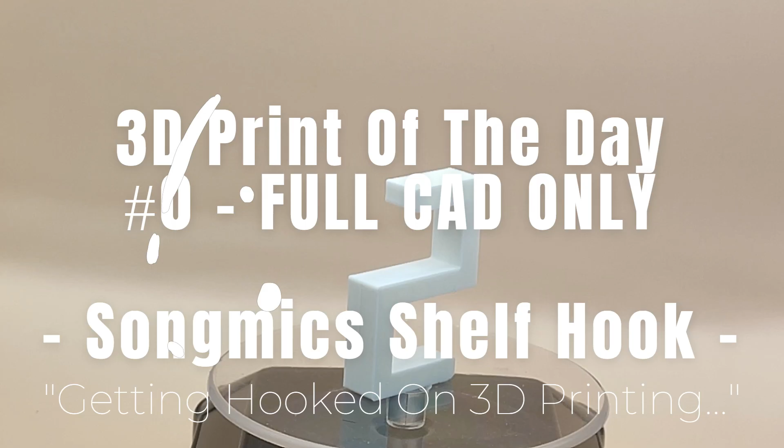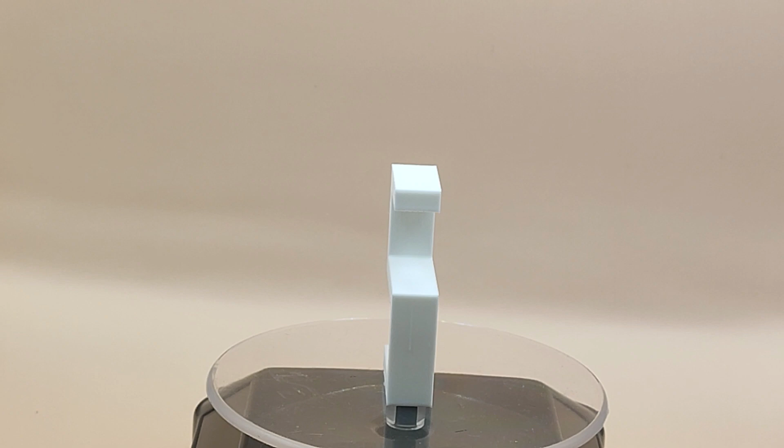This is a complementary video to the other one, the 3D print of the day, the Songmics hook. In that video I had a time lapse of the 3D CAD changes I made to the original model I fetched from Printables. So I thought it would be good to split the videos up, for those who want to see exactly what changes I did and how I did them, and for those who just want the time lapse without spending too much time in the 3D CAD.

I'm using 3D Builder software, which is a very basic 3D modeling software. Maybe CAD is a bit too optimistic for that application, but since I'm a newbie, I'm using 3D Builder since it's easy to start with and take your first steps, especially for modifying existing 3D models, like changing sizes, cutting and pasting, and stuff like that.

So here we'll follow the 3D CAD process for those interested in the changes I did, in case you'd like to make the hook longer, shorter, wider, make some cuts, or append something. So that's basically what this video is.

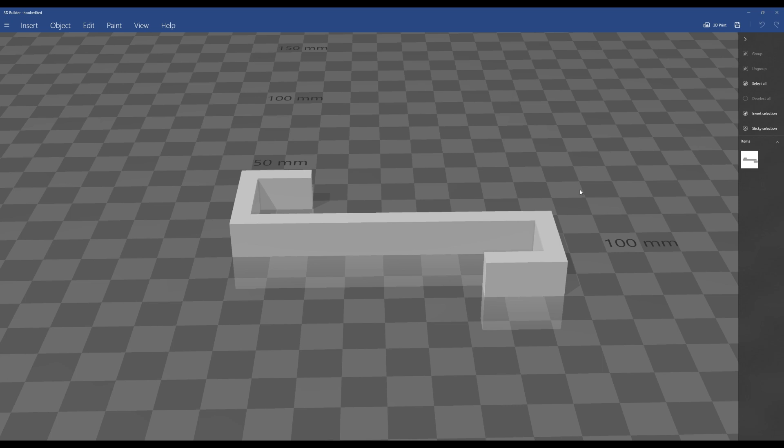Alright, I have imported the 3D model hook into 3D Builder. I'm using millimeters, the metric system, since otherwise I'd go nuts, as I'm not used to other measuring systems much. So here we have the hook.

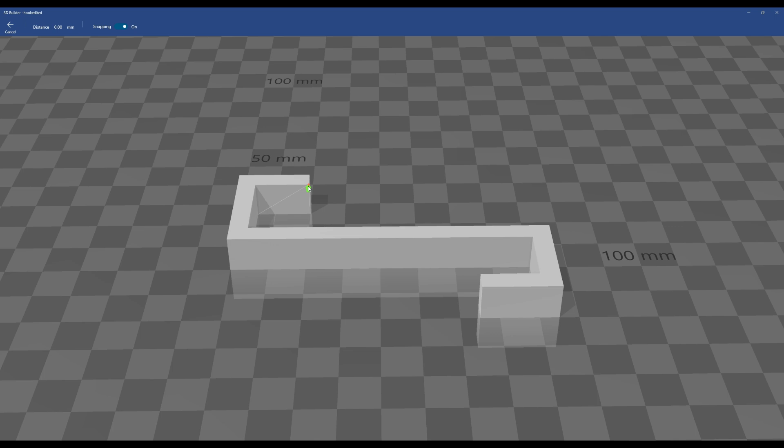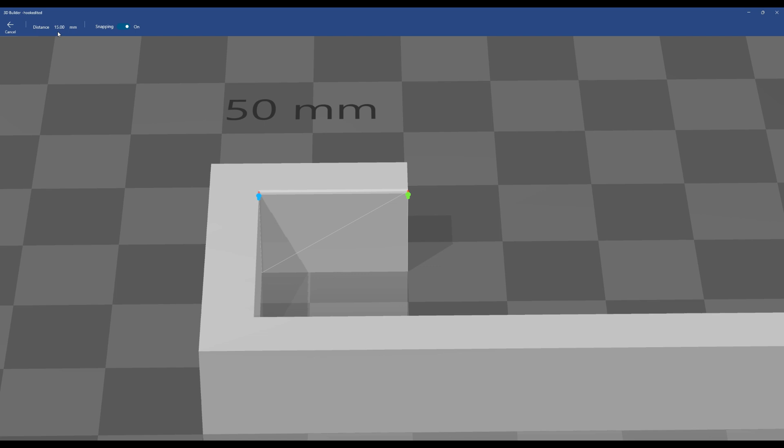Let's see what we can do. First I want to measure a bit. I'm thinking this part will go behind the shelf, so the part that's not hanging outside. If I measure from here to there, zooming in, we have 15 millimeters. And I wanted to have 16 maybe.

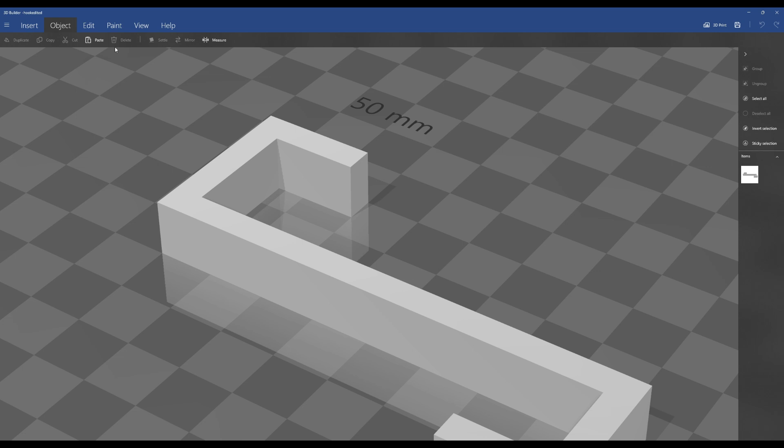So if I want 16 millimeters, I can also measure this block - 5 millimeters there. And the height is 10 millimeters.

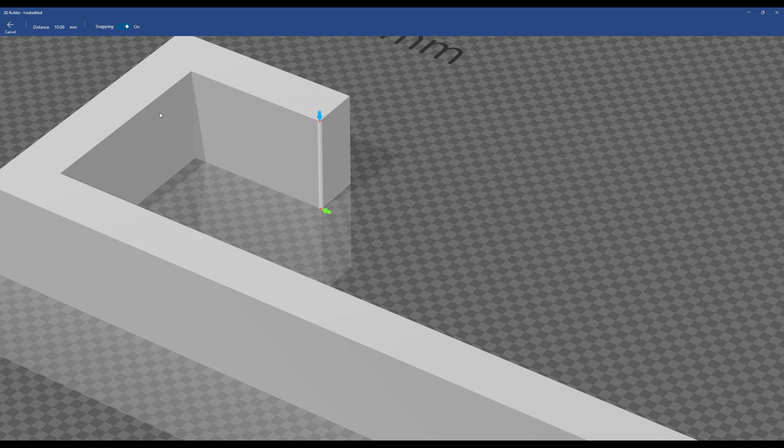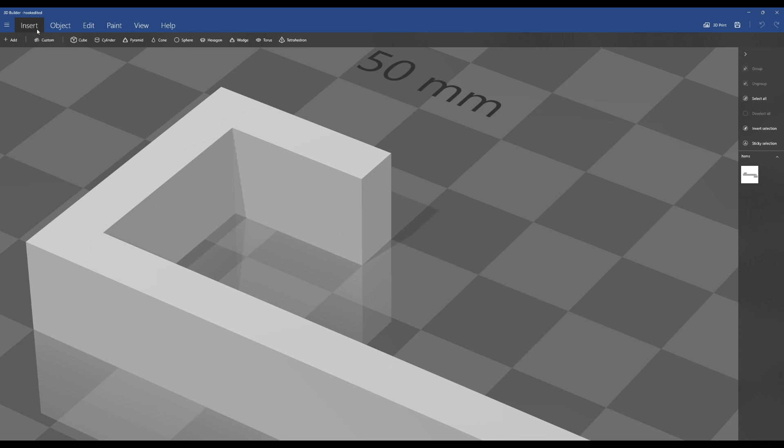If I insert a new block, excuse me if I'm slow here, I've never been able to do 3D stuff before, so here we are. 5 by 10 millimeters. So if I insert a cube, and move it a bit, the side and dimensions - X is this way around, so I want 1 millimeter.

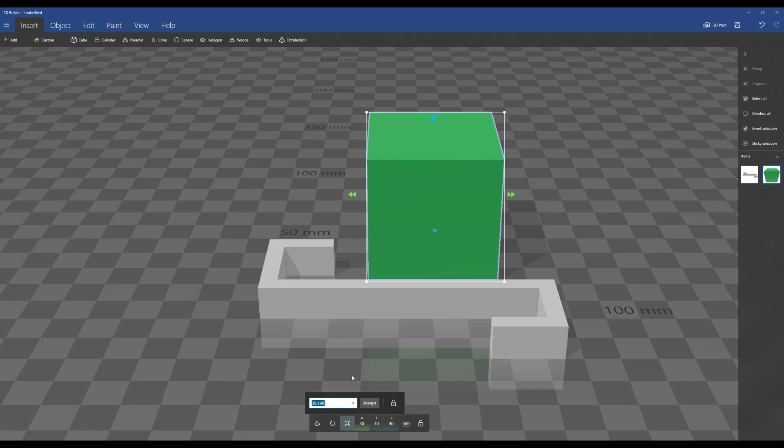1 millimeter extra, and then Y should be 10 millimeters - no, 5 millimeters, sorry. Getting a good start here. And the Z should be 10 millimeters.

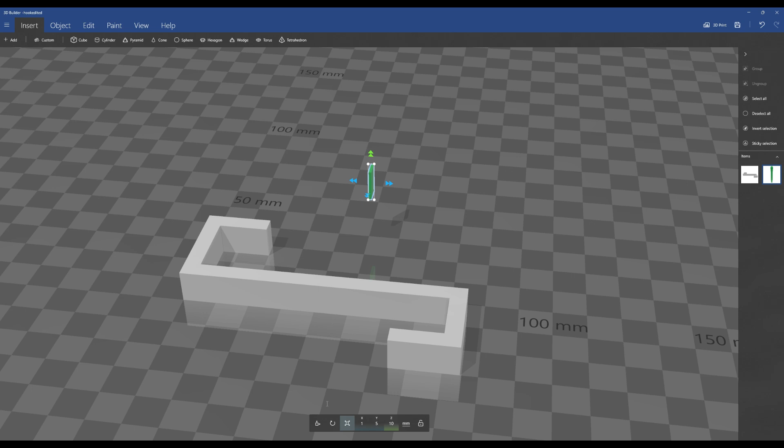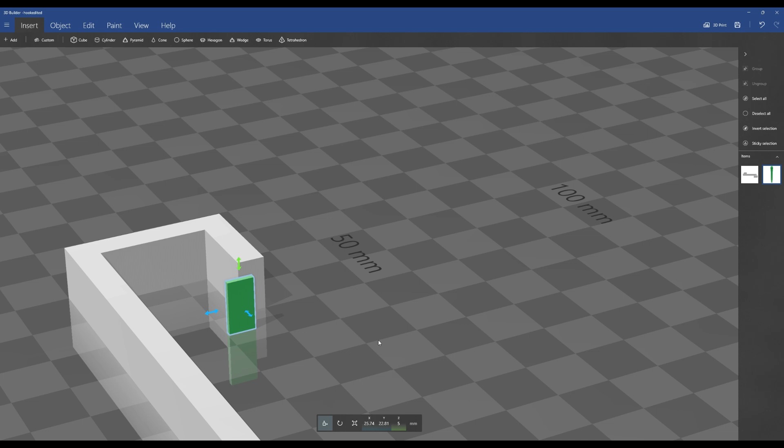And now if I move it around - it should fit, right? No, I've messed something up, haven't I? No? Yeah? Or no, I think the 3D stuff is just confusing me a bit. I'm sure I'll get used to it.

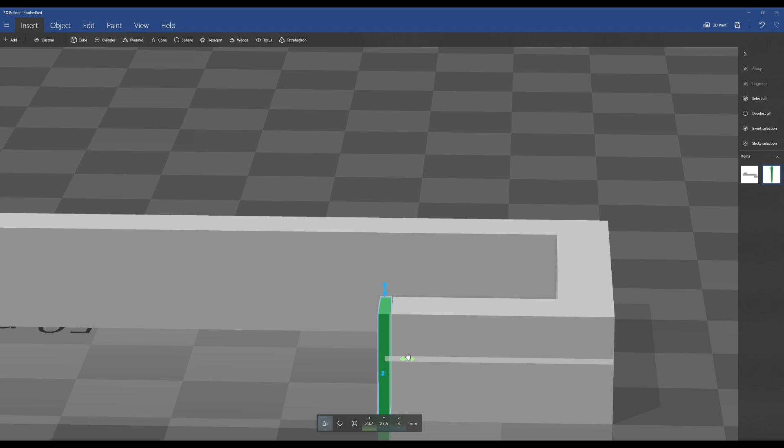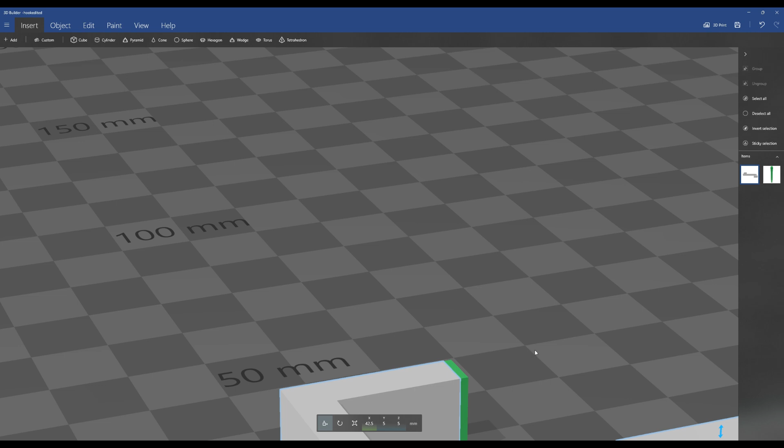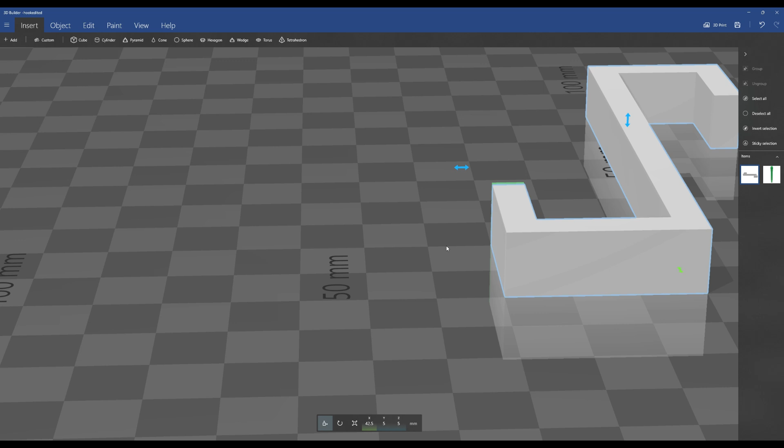Is it correct? Can I have a closer look? I don't know how to do this the right way, but I suppose I can look from here if something is protruding somewhere. If I deselect all there - right, now it looks pretty nice.

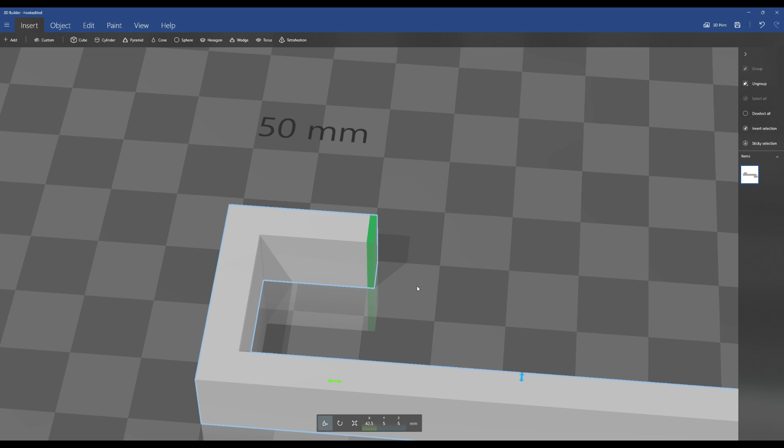So with the addition of that, I can hold the control button and group them. I think that's right. And if we measure this now from there to there, we get almost 16. Maybe it's good that it's not exactly 16 - it doesn't matter. So that part is done.

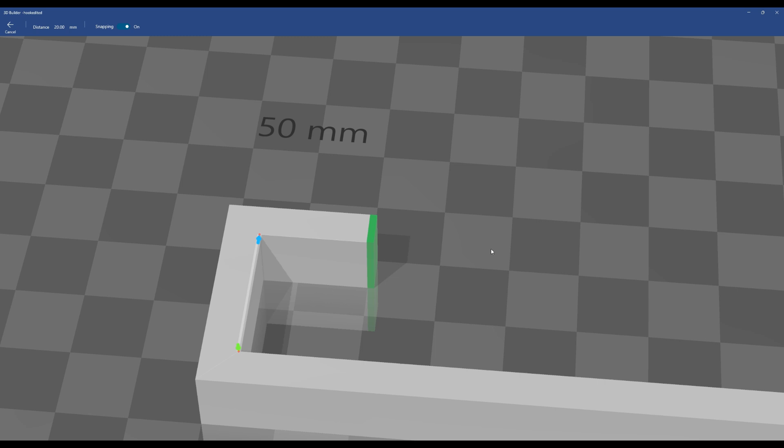Now I want to measure this part as well. It's 20 millimeters. So I want to have it - was it 16 also? 16 millimeters as well.

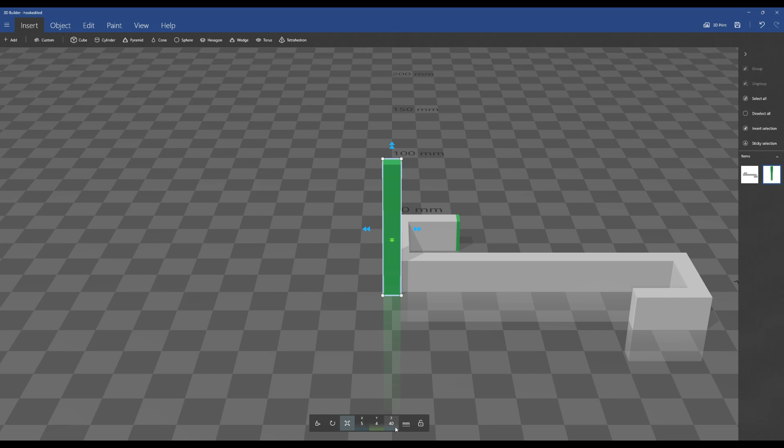So maybe if I can insert a new cube, which is 5 millimeters, and I want to remove 4 millimeters, and the height doesn't really matter, but we can set it to 10.

So if I go to the move option, if I place it on the ground so to speak, if I can remove this part from it we should be good, and then concatenate the other ones together. So maybe I can go to edit, subtract, maybe.

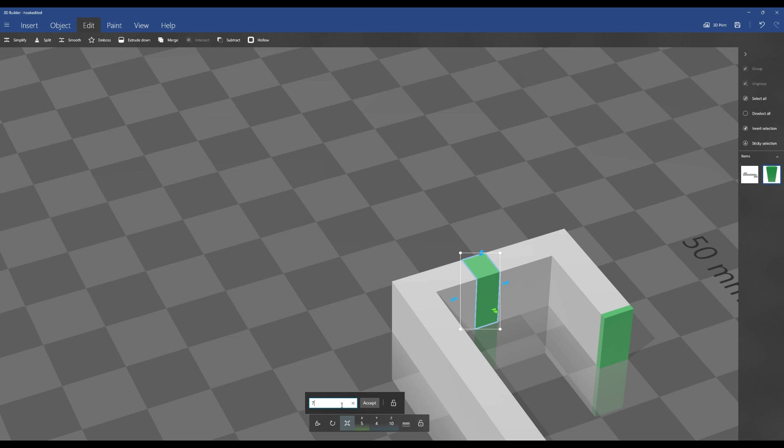Almost. Well, I can make it easier for myself by setting the X, not the position, but I can set it to 7 millimeters. And now I can subtract. Yeah, this is fun.

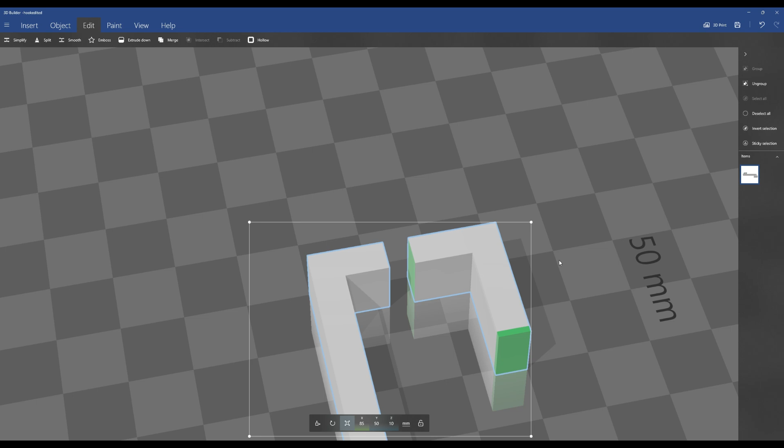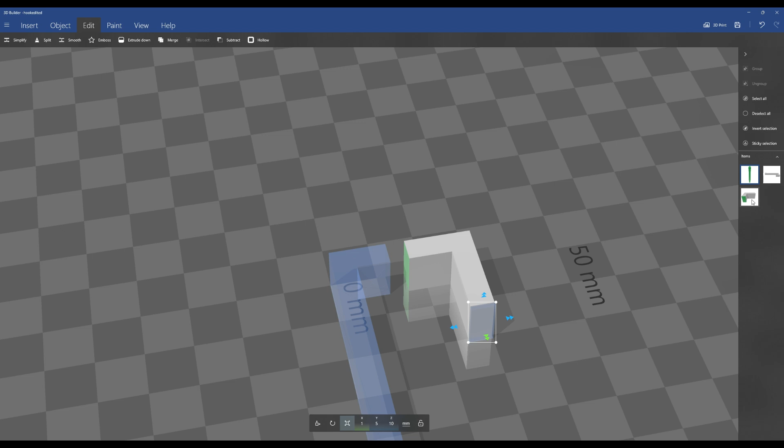And now, can I? How do I grab this object? Oh I see, okay, so I ungroup things, but this one and this one - if I control click so both are selected, and group only those, will I be able to move and drag this? Yes.

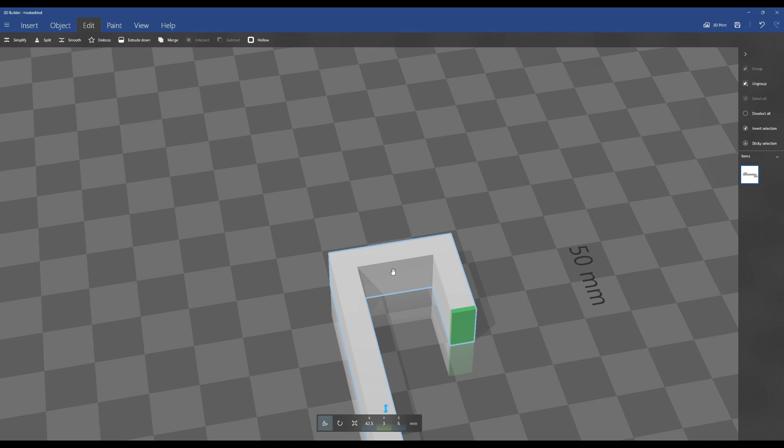There. And then if I group them together, then they're all in one piece. This is great fun.

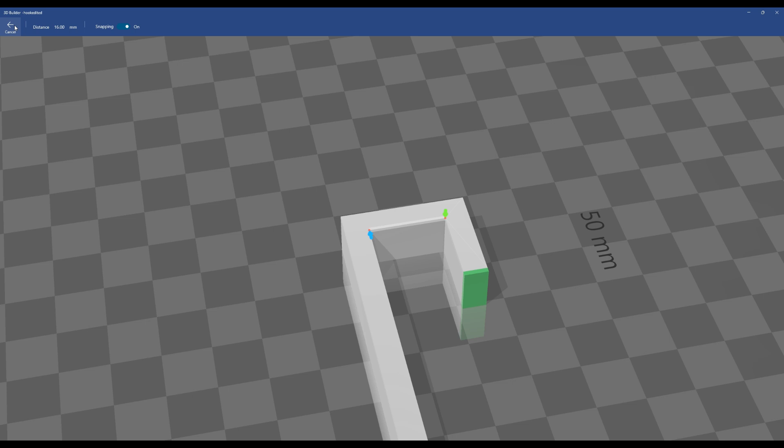Now, object measure - let's try to measure this. 16 millimeters, how convenient. That math works also in 3D - it was very unexpected, but we seem to have proven something. Maybe that I suck at this, most of all.

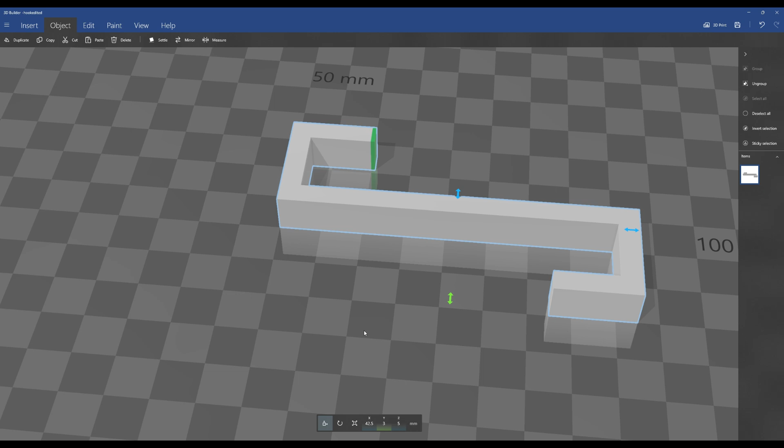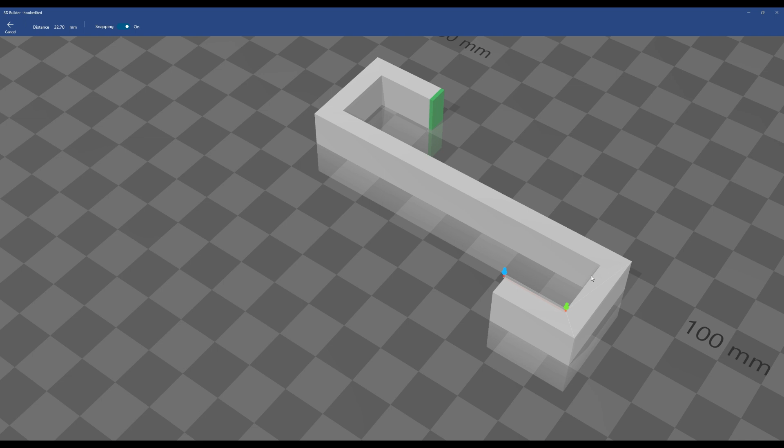Let's measure this hook part, which will be on the outside - 15 millimeters. And then 22.7 millimeters. I don't know about the hook here, how I want it really, but let's leave the hook part as it is for now.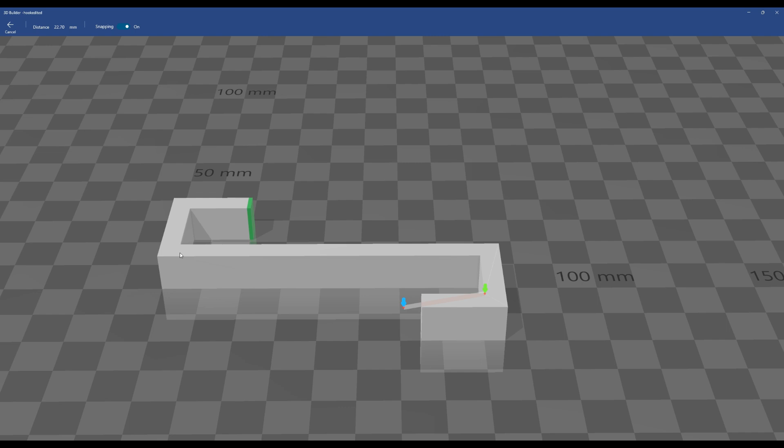So let's measure the distance from there to there, how much overhang we have, so to speak. 80 millimeters. Well, actually, the overhang, maybe it could be like 2 centimeters.

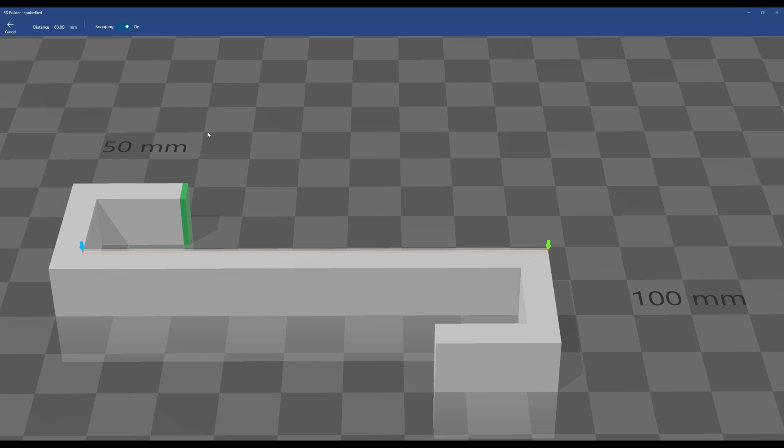So if we remove 60 millimeters, should be. Well, actually, I should maybe include the edge. Should I measure to here or to there? The bottom will be there, so the perceived length will be up to the outer corner here.

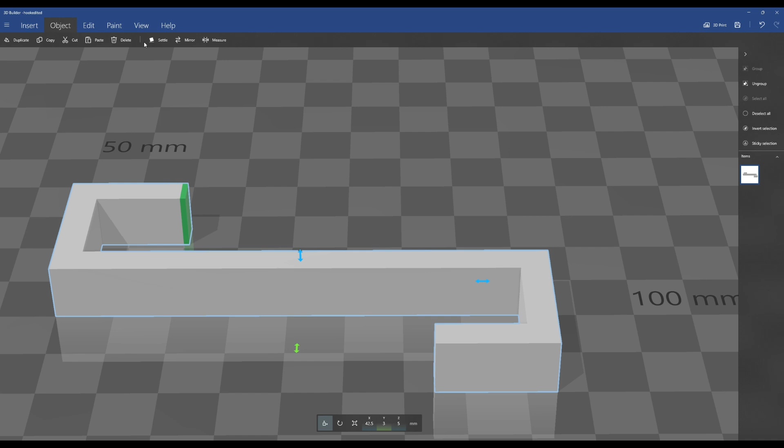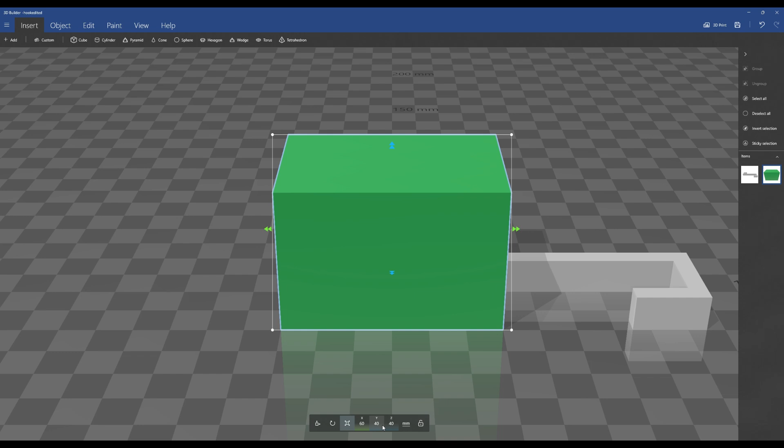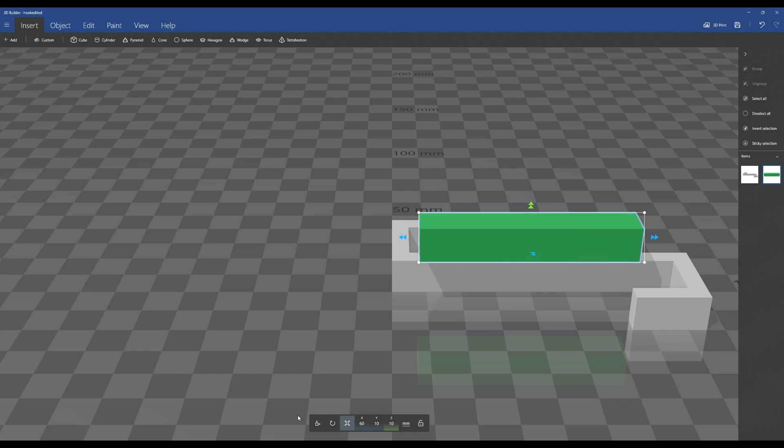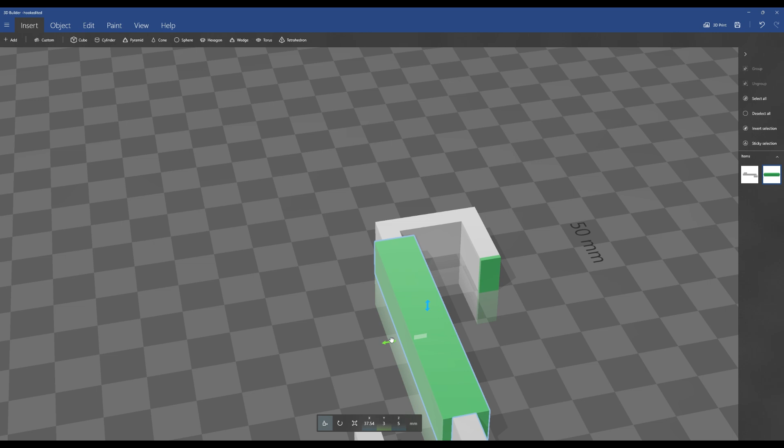But basically, let's insert another cube, which will be 60 millimeters to remove. It could be maybe 10, and Z doesn't matter really, but it could be 10. So we would remove something like this. Does it seem right?

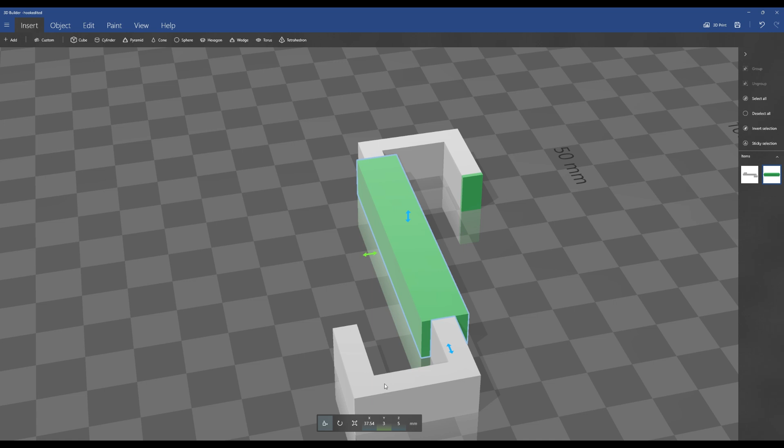Well, maybe, right? If I go 2 centimeters to the bottom from there. Yeah, I could. X could be 55 instead, like that. And then we choose edit, subtract.

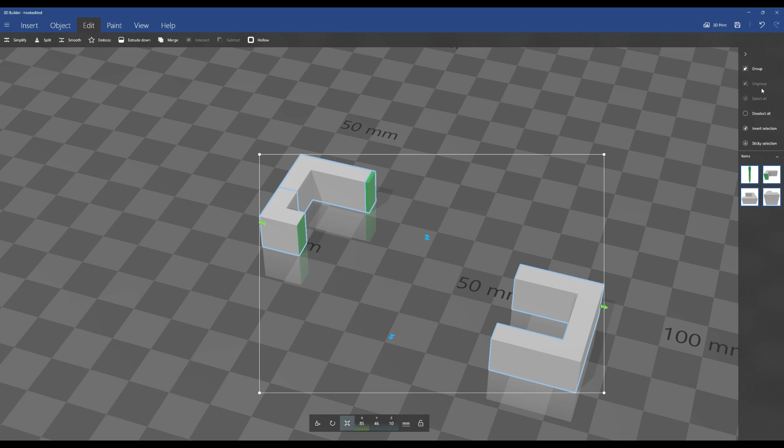And ungroup. But it ungroups everything always. Can I make something stick? But okay, it understands that these are separate at least, so I could move this until it hits it. It seems to snap there.

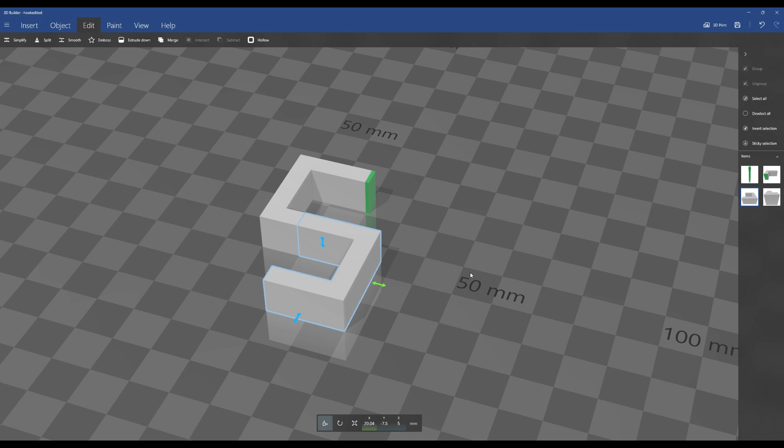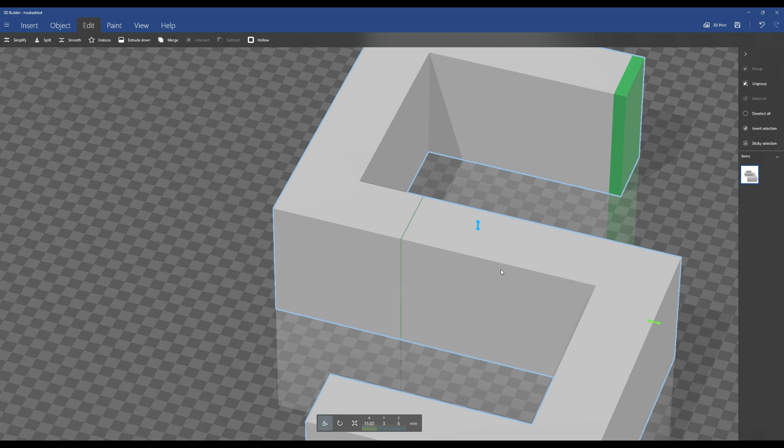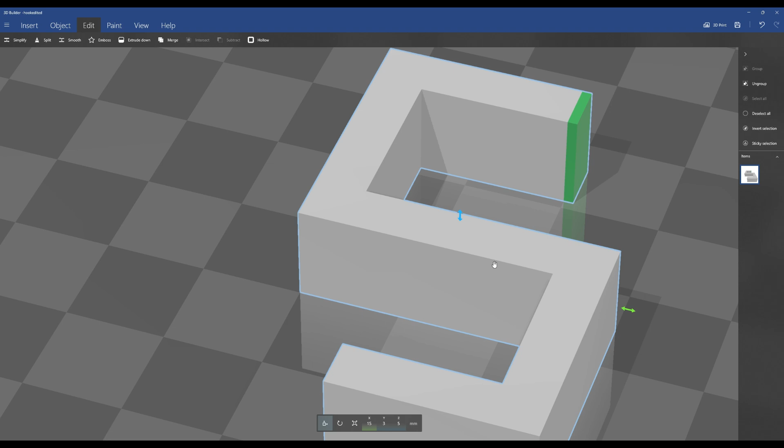And then if I select all and group, oh, we got some kind of issue. I don't know, is it touching? Maybe if I just press Ctrl Z. Oh, sorry, and select this one. If I go a little bit further in, select all, group. Well, okay, now I don't have a joint there. I don't see any green.

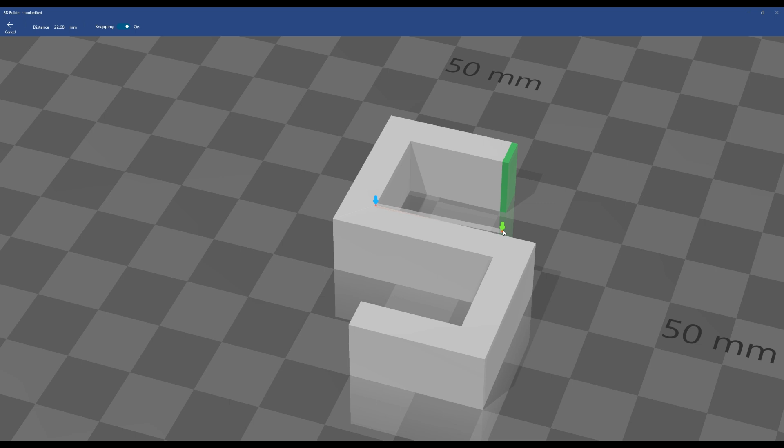Let's measure this one. So from here to here, it's 25 millimeters, and from here to about here, it's 22, should be 22 and a half about, yeah. So yeah, there's a hook. I haven't yet printed it out, so we don't really know yet.

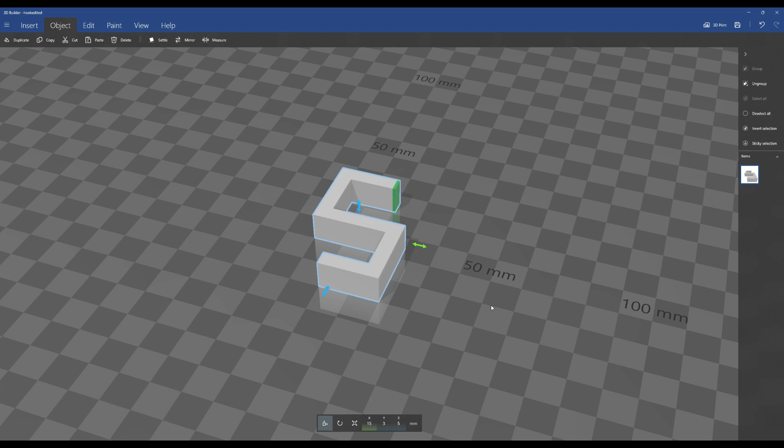All right, but I suppose let's try to print this out. I will.

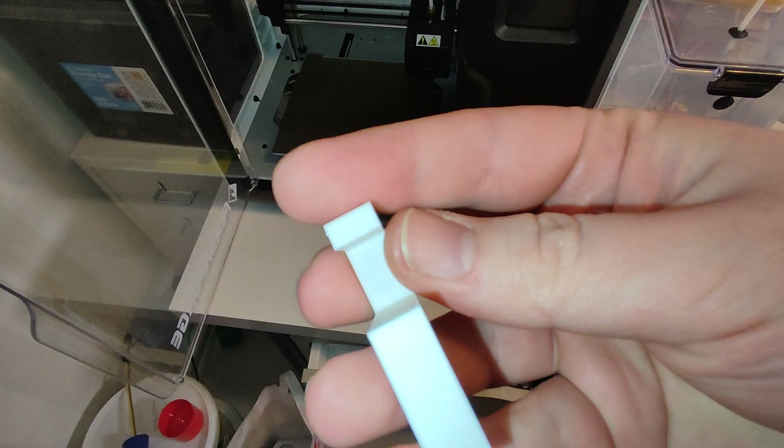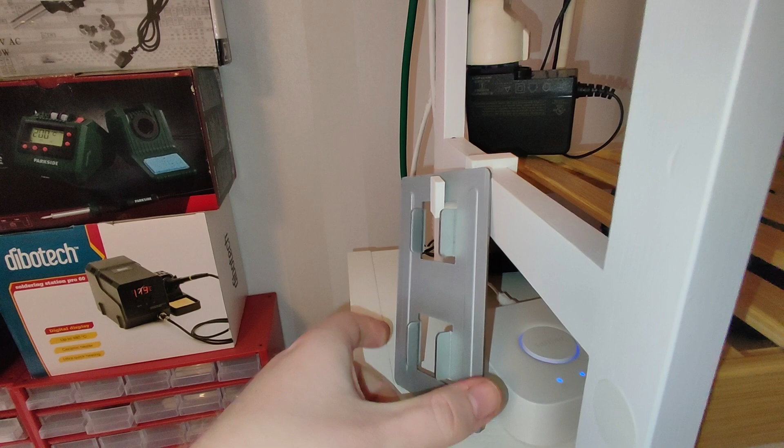Try to do it like this instead. There's about, maybe 1 millimeter of play. That's good, it slides so I can easily slide it around, hang on it. Maybe this is not the best example, but sure, let's see here. Yeah, we do have some more space here actually. We could have made it a little bit longer here, it would be sturdier maybe, but yeah, it's good.

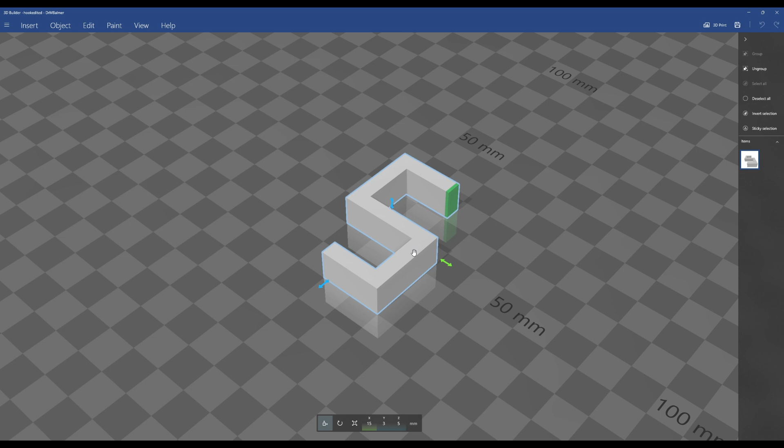So there we have it. So the hook was a success, I think. However, I think we can do a little bit better. I wanted to see what happens. Well, we could make this a bit narrower.

Allow me to remeasure this from here to here. It's 16 millimeters. I would like to reduce it by half a millimeter, since this part of the shelf is seemingly 15 millimeters. There was a millimeter of play, so maybe we can reduce that by half and see if we can get a little tighter fit. So that's the first thing.

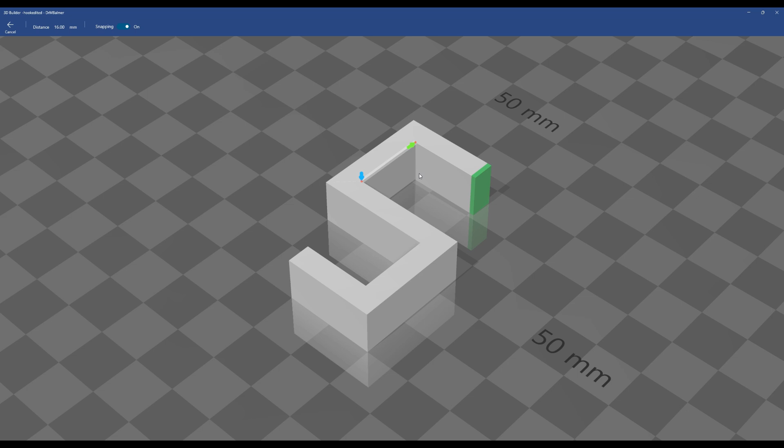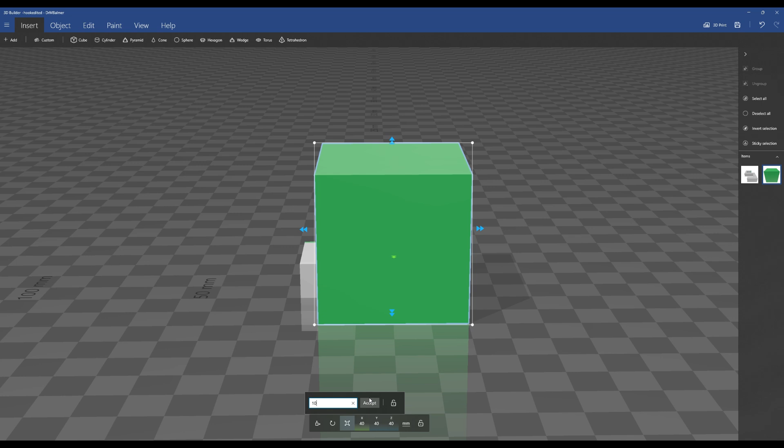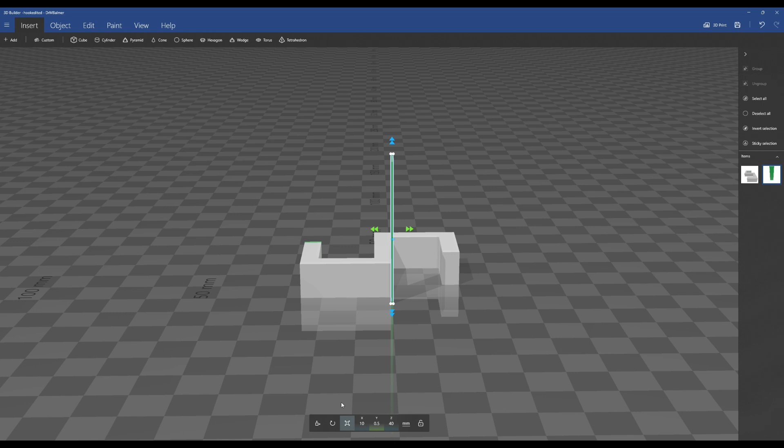Let's do that. I will do it in the way that I have done previously, I will insert a cube. X direction, that can be 10 millimeters. Y direction, this should be 0.5 millimeters. Have to enter a period, and the height can be this height.

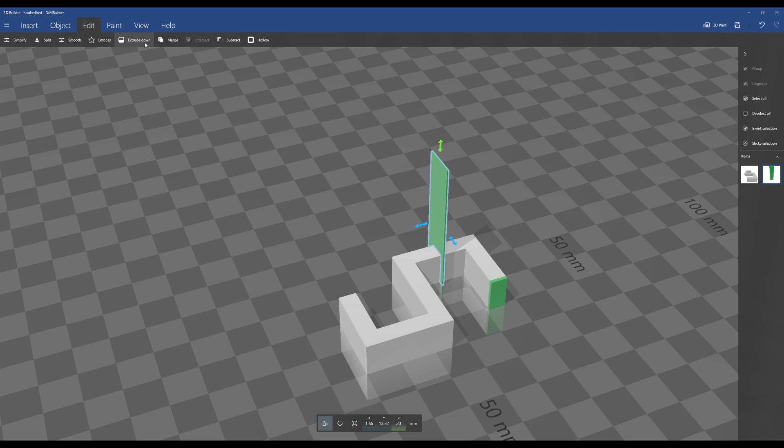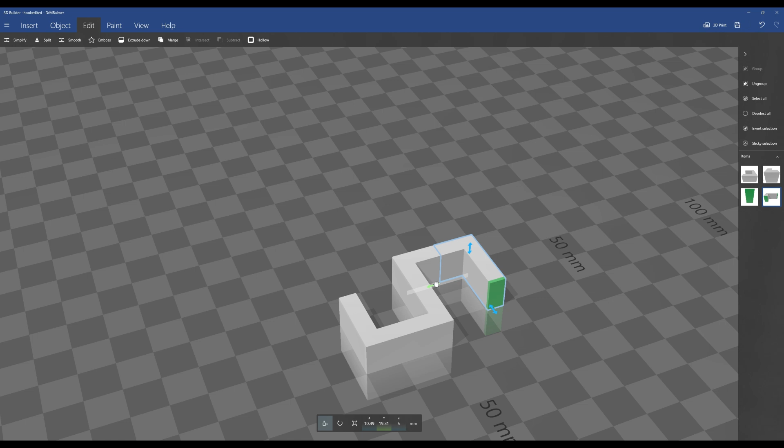And then we want to move it, removing half a millimeter. And we choose edit, subtract, ungroup, and then I choose this one and this one. We group them together, and then we move it seemingly like this. Deselect all.

Right, and let's measure again. Yes, 15.5 millimeters, it says over here now.

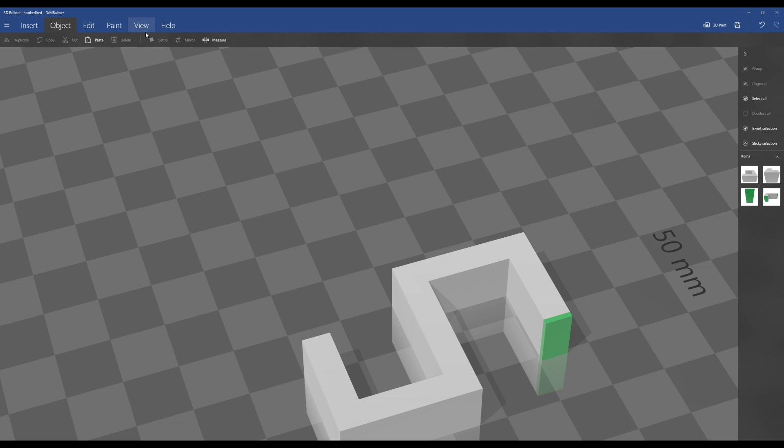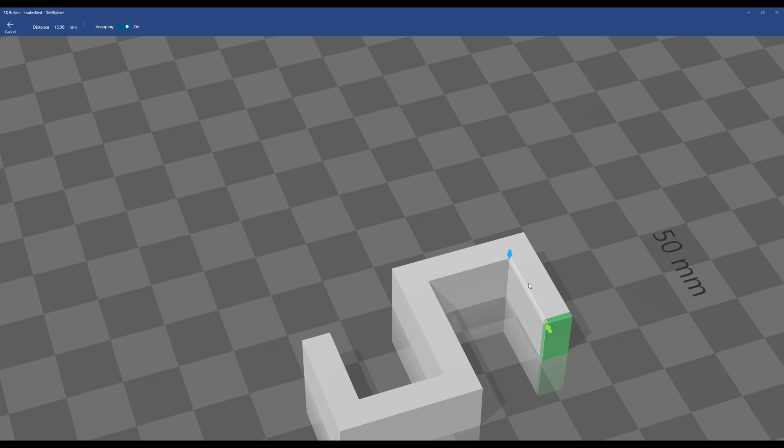I would like to add. This part from here to here, it's 16 millimeters. So I remeasured the shelf, and there is 2 centimeters, so 20 millimeters. So it can be deeper to better grasp the shelf edge, which should prevent the hook from falling off when lifting something that is sitting on the hook, so that the hook doesn't follow it off the shelf.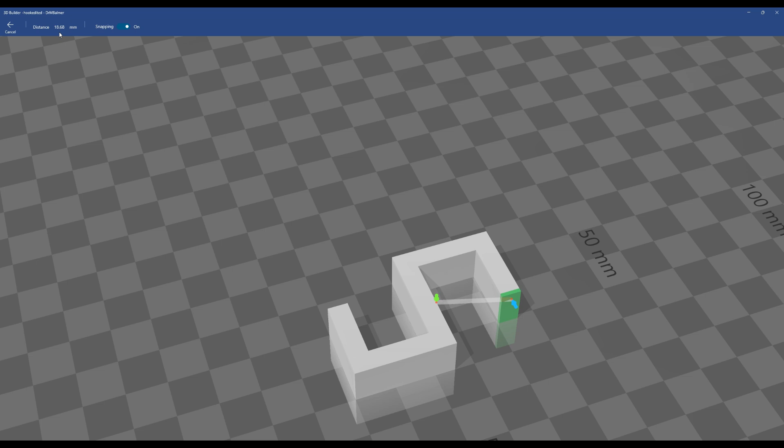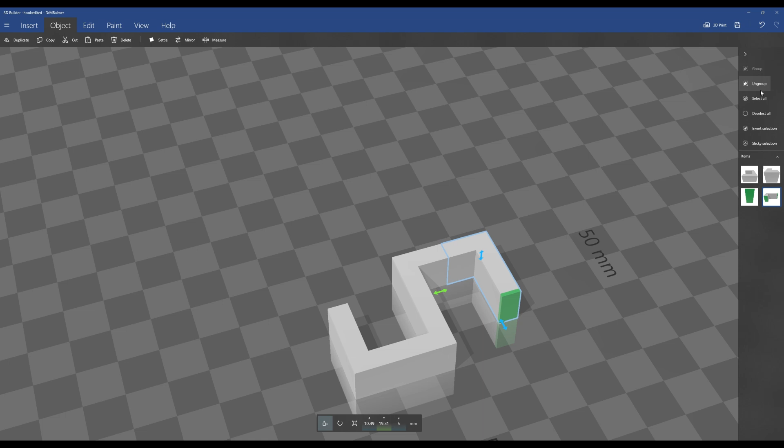So maybe we can add, I don't know, maybe we can add. So we're at 16 millimeters, maybe we can make it 19 millimeters, so 3 millimeters more. I should be able to, let's see here, this, if I ungroup this one, I should be able to just elongate it, right?

I need the x-axis here, indicated by the green arrow, and instead of 10.49, we could add 3 millimeters, we can say 5. Oh, now I did the wrong thing. I need this one and x, and instead of 1 millimeter, we make it 3 millimeters. No, 4, sorry, we want to add 3, so 4 millimeters, and then let's move it into place so that it snaps to the end piece here.

Right, I think that's it. So allow me to remeasure from here to here, 19 millimeters. Yeah, maybe we should do 19.5 even. Yeah, let's try that, it should be pretty good then, I think.

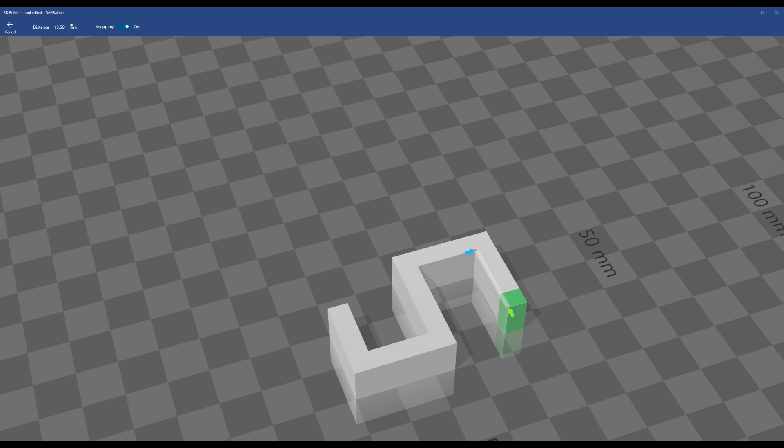Actually, so we add 0.5 millimeter, that, and then we snap it into place. And let's remeasure this from there to there. 19.5, yeah. Alright, let's select all and group them.

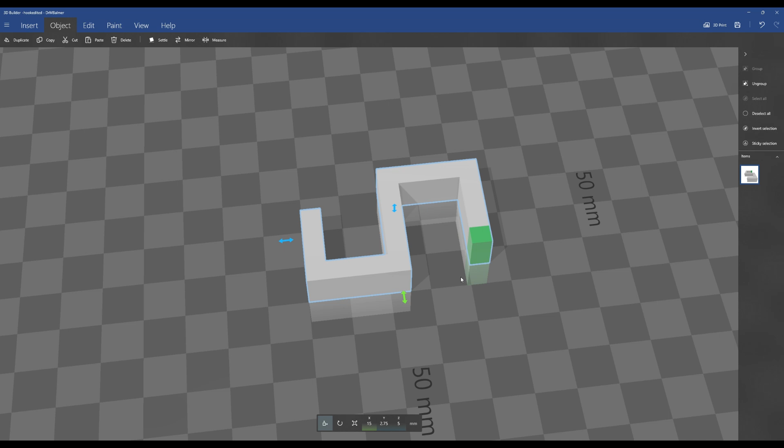Yeah, so I want to try this one out. Let's do a print, and let's see if it... yeah.

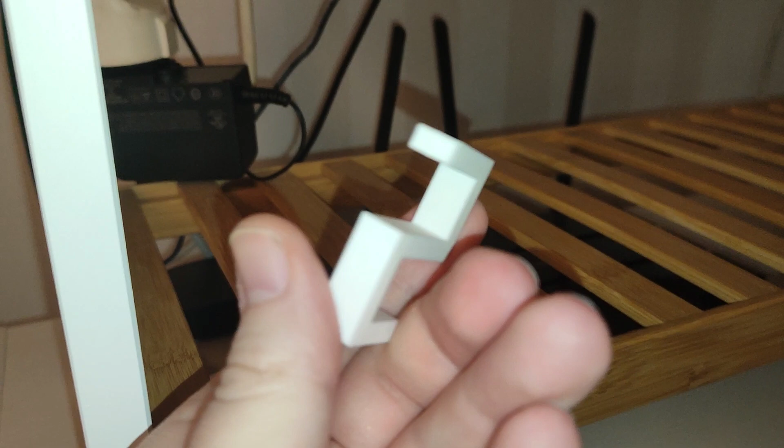Right, back at my Songmics bamboo shelf with the newly printed hook. So it should go on this way. Let's have a look. Yeah, look at that. It does slide, but with substantially more force. So we managed to tighten up the tolerances here nicely, so it's sturdier.